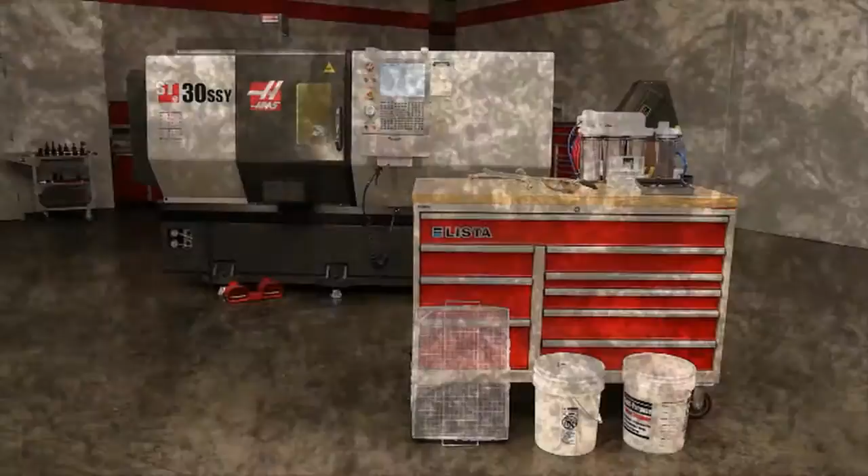Welcome to our Tools of Coolant video. We'll take a look at the tools most commonly used by shops to check and maintain their coolant.

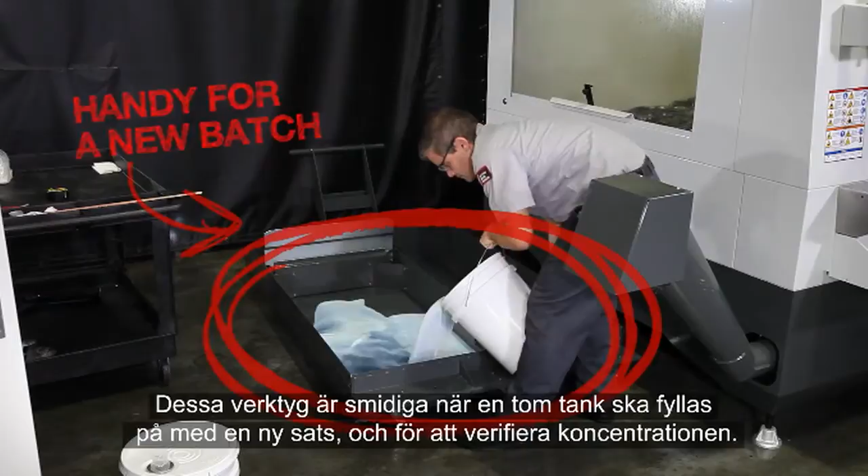We'll start off with the refractometer. This is the most important tool you'll use for keeping your coolant working correctly. Its purpose is to measure the concentration of your coolant. They are handy when filling an empty tank with a new batch to verify the concentration. But a refractometer is an absolute necessity when topping up a tank with coolant already in it.

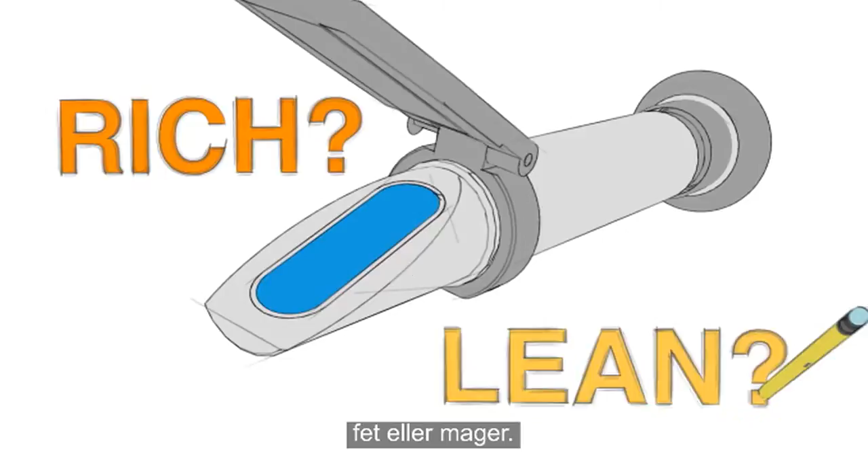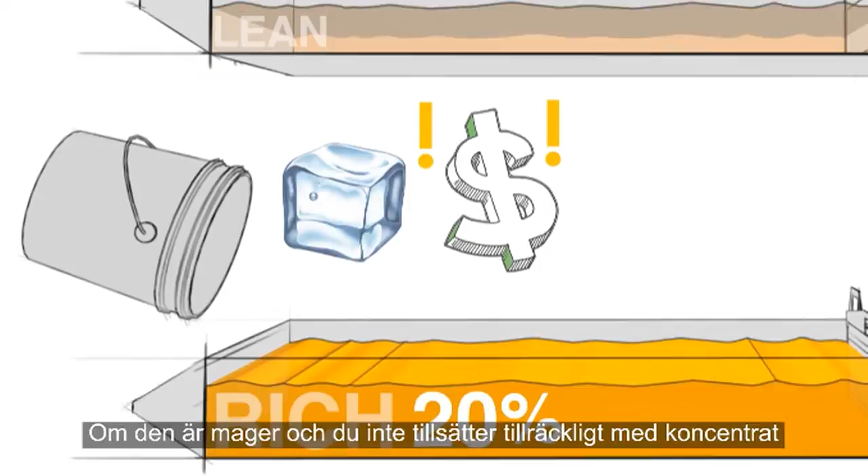Without a refractometer, there's no way to know whether your coolant is running rich or lean. If it's rich and you add more concentrate, you will simultaneously reduce cooling capacity and throw money away. If it's lean and you don't add enough concentrate, then you risk short tool life, bad surface finishes, and rusting your machine and parts. Guessing how much concentrate you should add will lead to problems.

Don't eyeball it. Measuring your coolant's concentration is easy with a refractometer. We're using a manual model here, but digital versions are also available. Think about this: for less money than this 5-gallon pail of concentrate, you can purchase this tool and never have to guess about your concentration again.

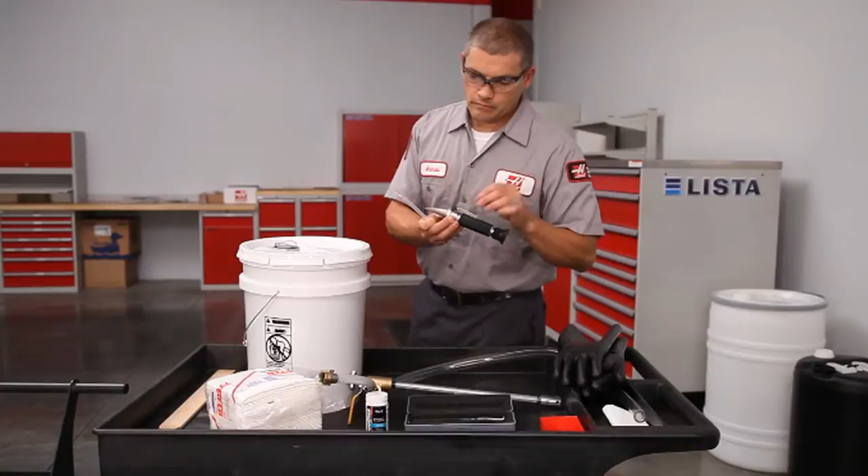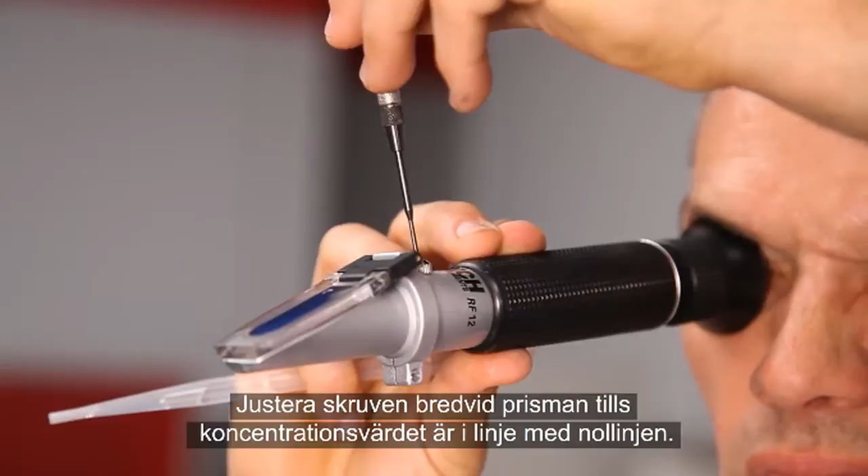So, how do you use one? The first step is always to zero the refractometer, or set a baseline for the water you'll be using to make your coolant. Place several drops of the water you're using on the viewing prism and close the plate. Adjust the screw beside the prism until the concentration reading is lined up with the zero line. Wipe off the prism. The baseline for this water has been set.

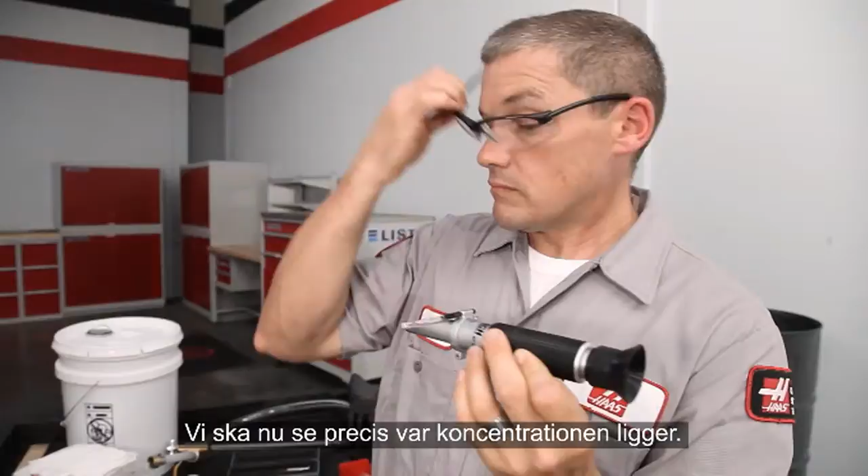Now let's check the concentration of the coolant. Take a sample and place several drops on the prism. Let's see exactly where our concentration lies. In this case, it's 8%, right in the middle of the 6 to 10% range, which is acceptable for most coolants.

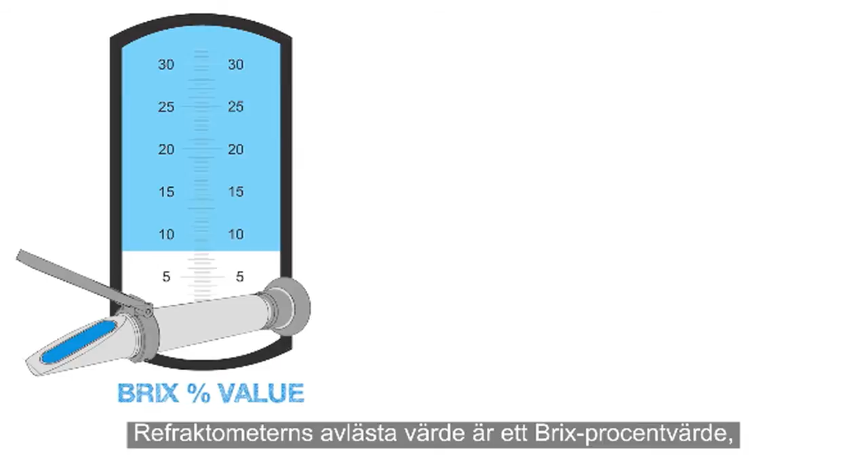The reading the refractometer displays is a Brix percentage value. This value isn't always the same as the coolant's actual concentration.

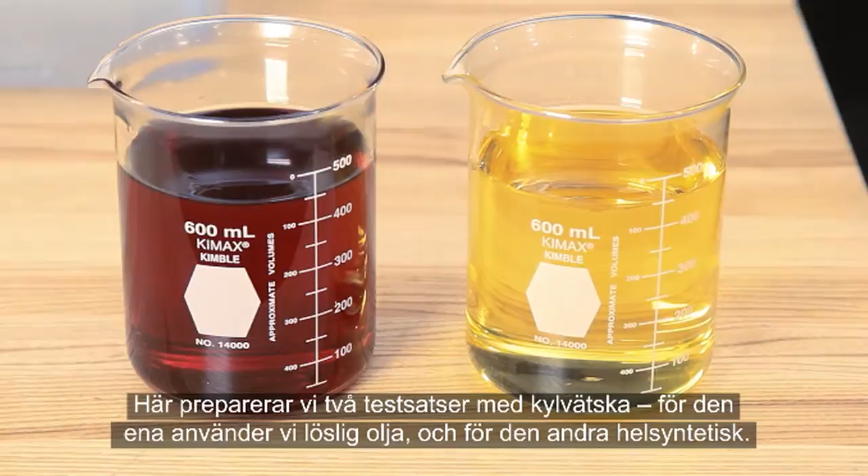Here we're preparing 2 test batches of coolant, one using a soluble oil and the other a full synthetic. Both vials are holding the same amount of concentrate, and both of these beakers are holding the same amount of water. We add the concentrate and mix thoroughly.

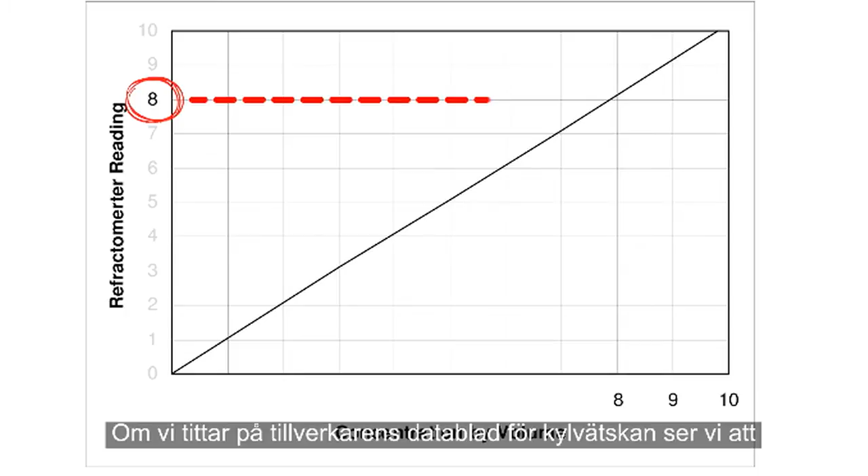Now let's see what our refractometer readings come out to. This soluble oil coolant shows a reading of 8% Brix. When you look at the manufacturer's chart for this coolant, 8% Brix equals 8% actual concentration, or 1:1.

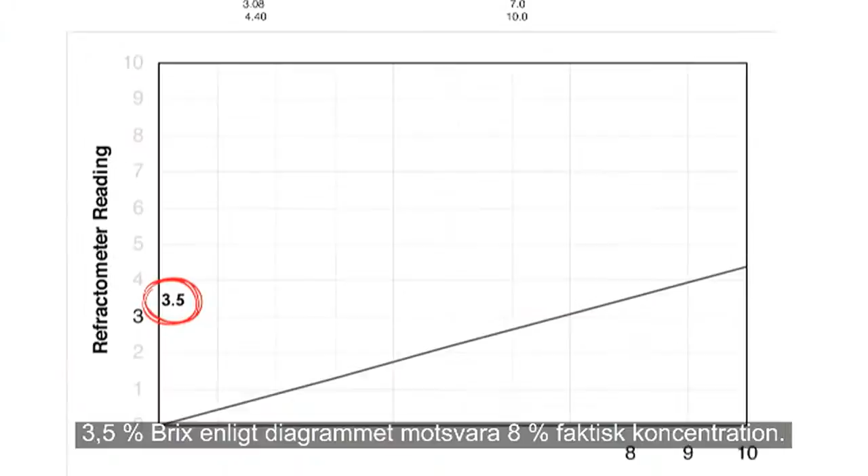The full synthetic coolant, however, shows a reading of 3.5% Brix. Looking at the chart for this coolant, 3.5% Brix equals 8% actual concentration. The ratio of this coolant is about 1 to 2.3.

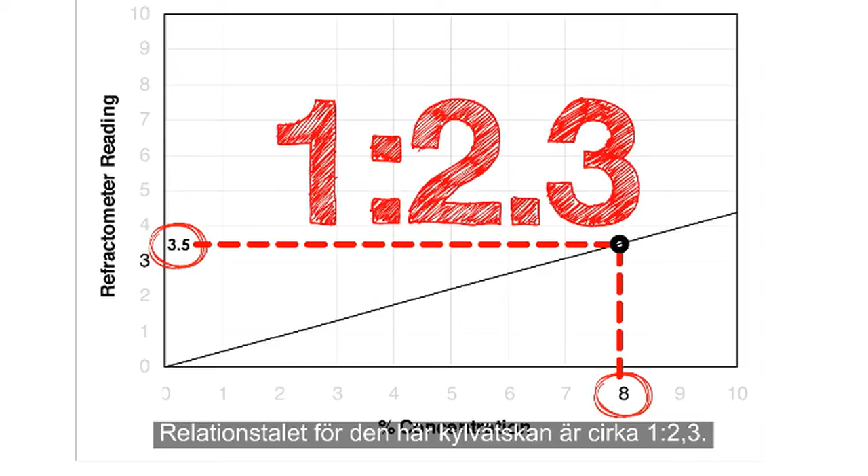The ratios are different, but the coolant concentrations are the same. Be sure to know the ratio of your coolant. Using a refractometer allows you to adjust your coolant based on sound information, not just guessing.

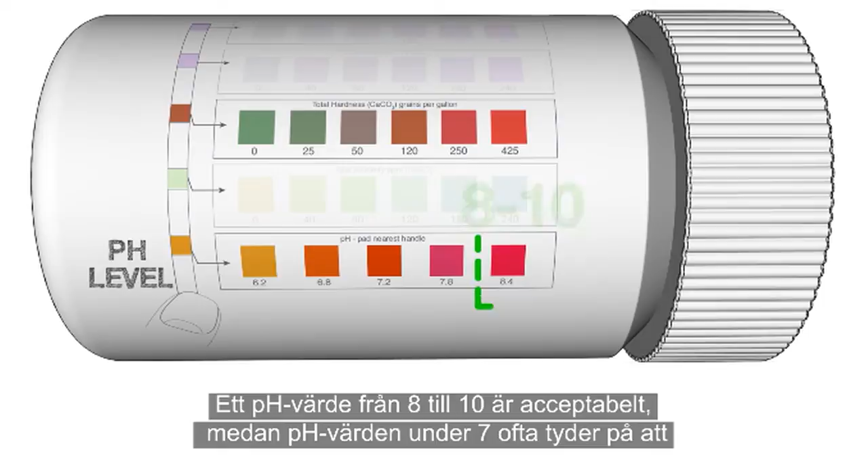What other ways can you check the condition of your coolant? Water quality test strips can be used to check the pH balance and water hardness of your coolant. A pH balance in the range of 8 to 10 is acceptable. pH readings below 7 generally indicate the coolant concentration is weak and increase the chance of corrosion and bacterial contamination.

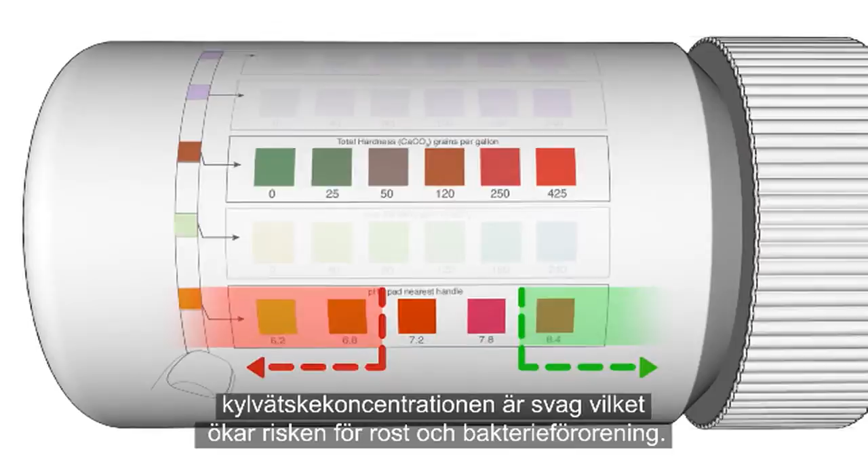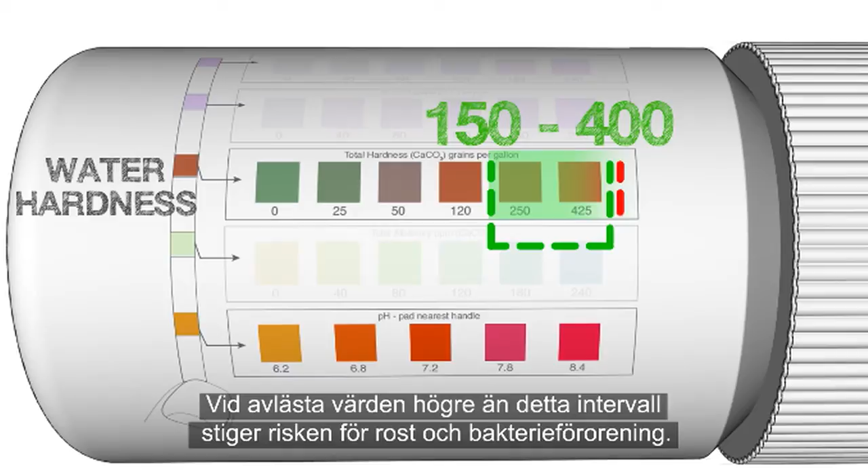A water hardness reading between 150 and 400 parts per million is acceptable for most coolants. Readings above this range also increase the chance of corrosion and bacterial contamination, and separation of the water and concentrate becomes more likely as water hardness becomes excessive.

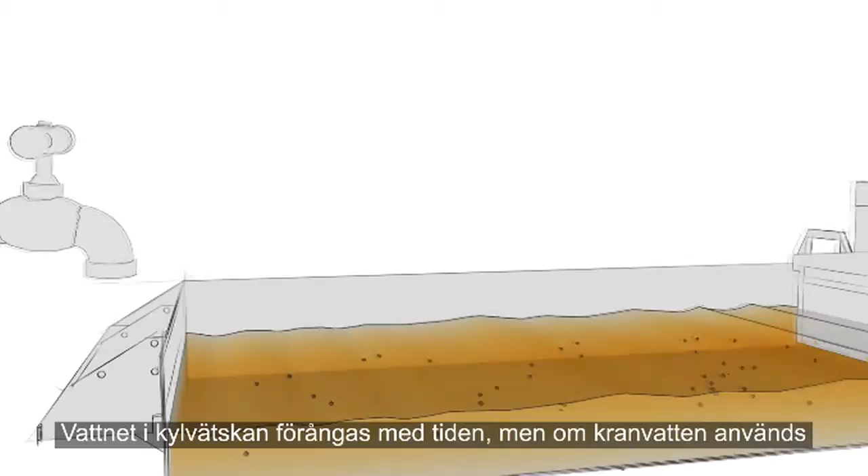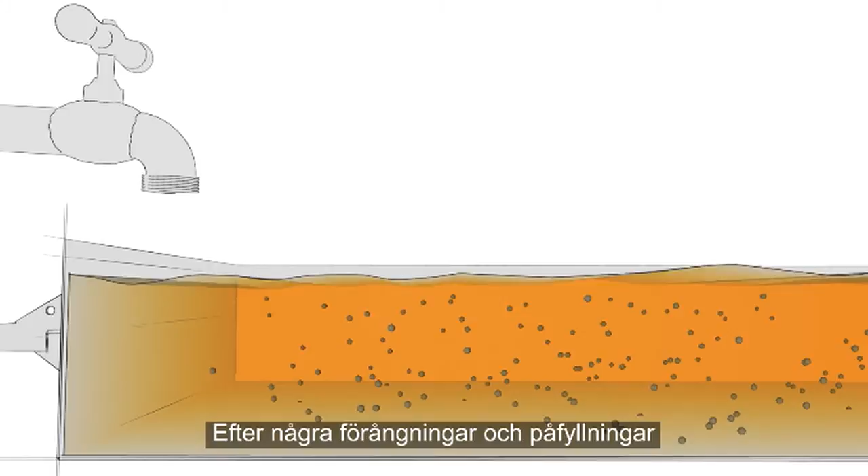So how does the coolant get to this high hardness level? Over time, the water in the coolant evaporates away. But if tap water is used, the hard minerals in the water do not evaporate. Each time you top up the tank with tap water, a new batch of minerals is added to the mixture. After a few rounds of this evaporate and top up cycle, you've got a tank packed with minerals, and your coolant may be ruined.

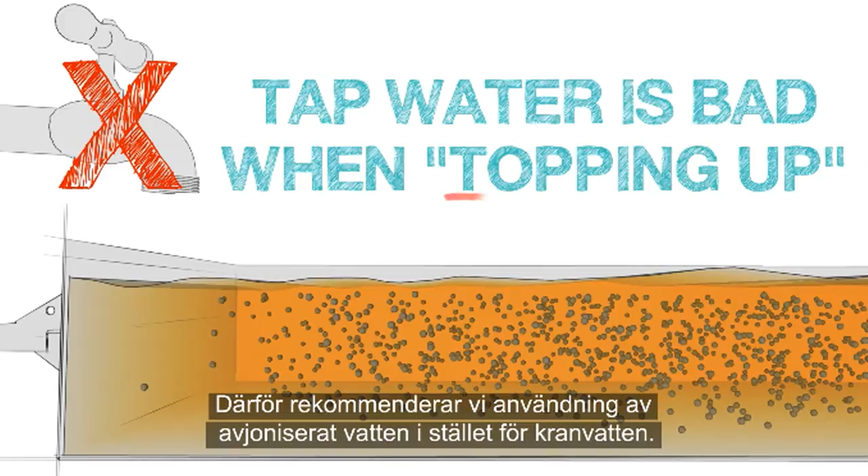This is why we recommend using deionized water instead of tap water.

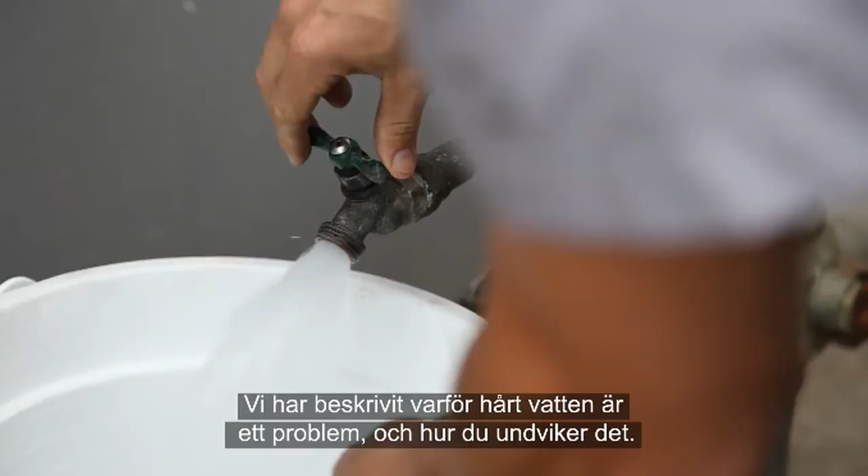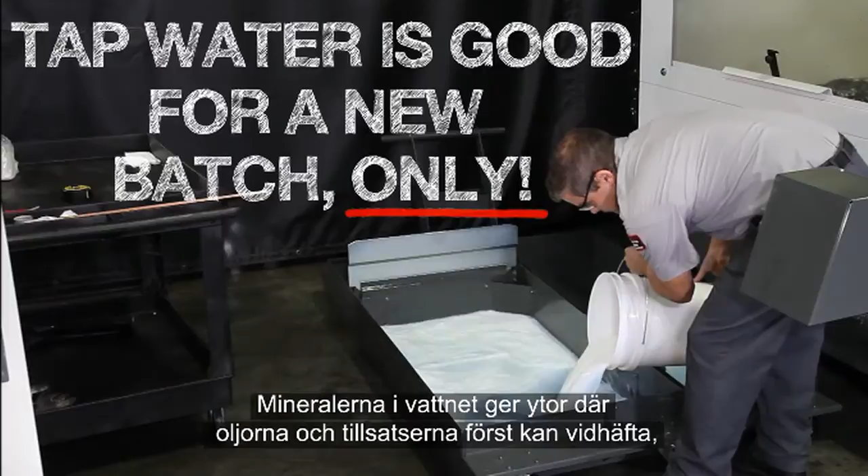Okay, so we've covered why hard water is a problem and how to avoid it. However, there is one exception we really need to mention. It's actually best to use tap water when you're making a new batch of coolant. The minerals in the water provide surfaces for the oils and additives to adhere to initially, yielding the best possible mixture.

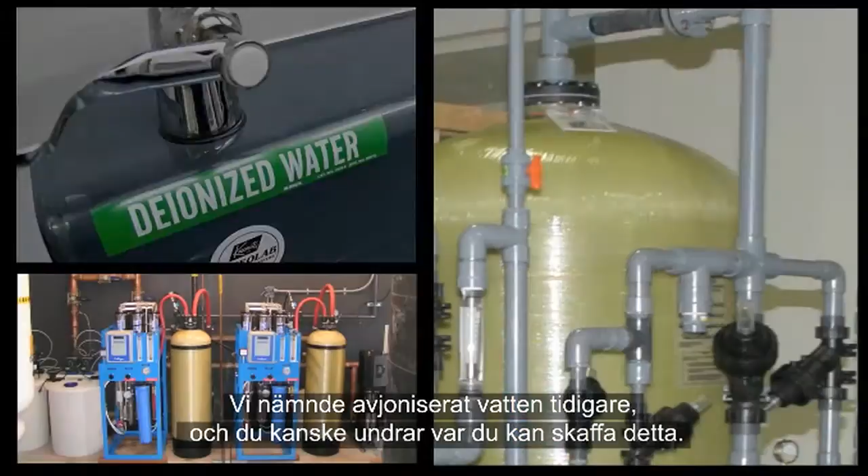Now, a moment ago, we mentioned deionized water. You might be thinking, where do I get this stuff? You can buy DI water from industrial water supply companies, or do what a lot of shops do, and generate it yourself using a water purification system.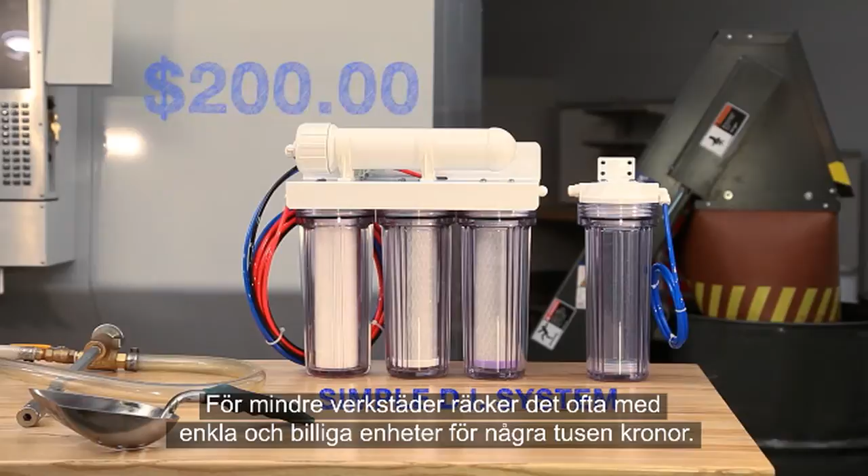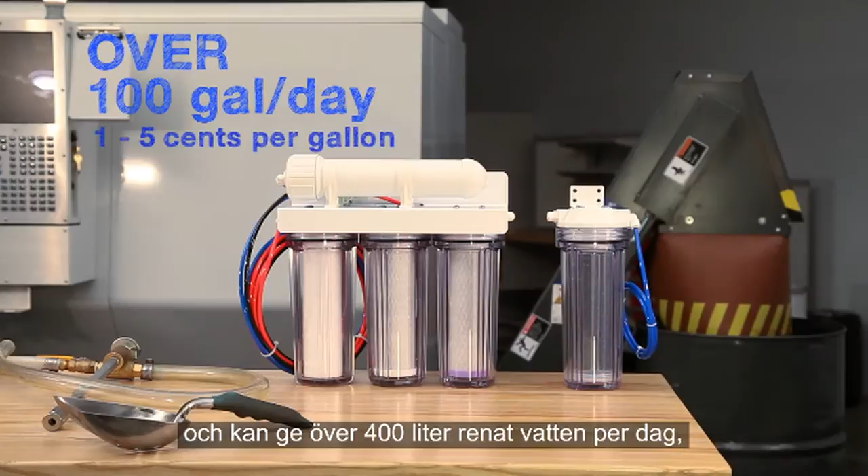Large shops with many machines often have complex installations maintained by water purifying companies. For smaller shops, simple, inexpensive units for a few hundred dollars are usually just fine. These simple systems combine reverse osmosis and deionization and can provide more than 100 gallons of purified water a day for a cost of 5 cents or less per gallon.

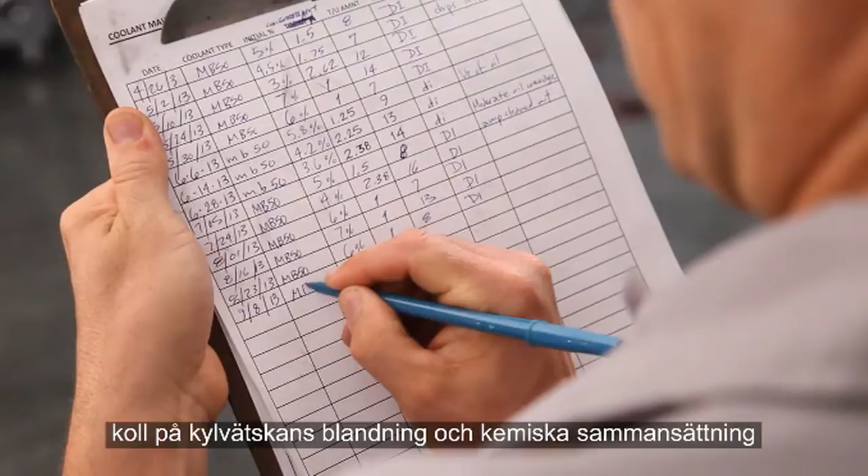If you attend to the maintenance of your coolant tank and keep your coolant's mixture and chemistry in check, you should never have to worry about bacterial infestations. However, in the unfortunate event that you've let your tank maintenance falter, you may find it turning into a stinky, disgusting mess. At this point, you may need to test for bacteria in your tank.

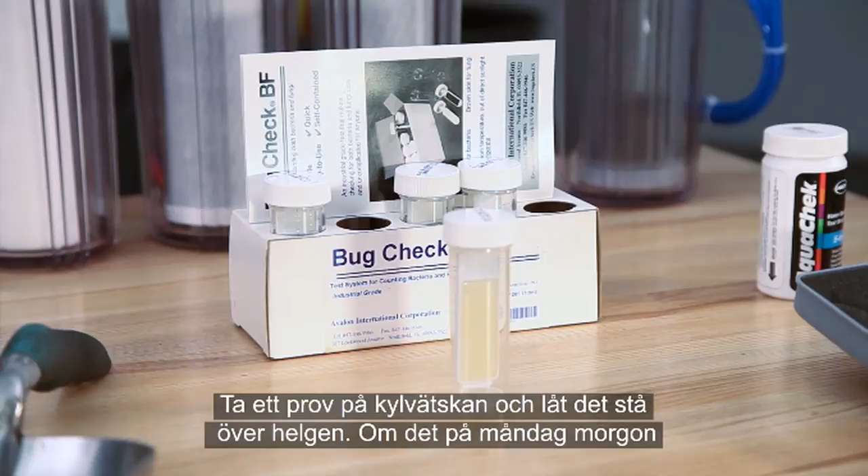Here we're using a bug check bacteria test kit. Take a sample of the coolant and allow it to sit over the weekend. On Monday morning, if it looks like this, you definitely have a bacterial infection.

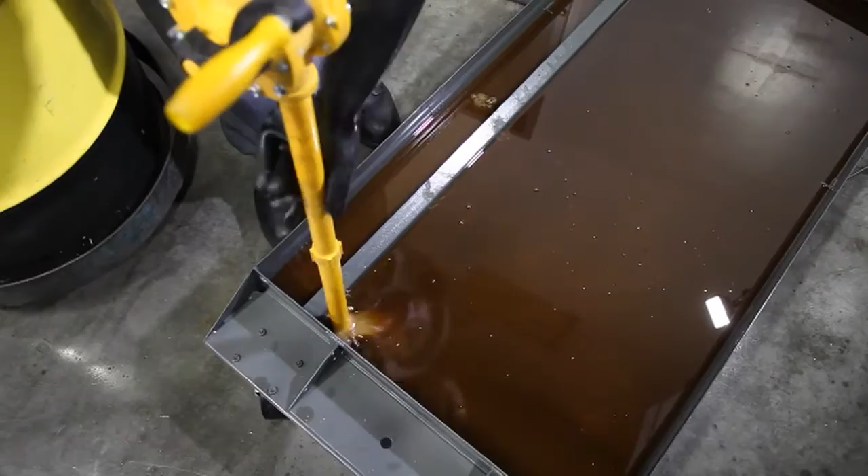In this case, you really have two options. You can add a biocide to your tank, or empty it out and start over. Since biocides are hazardous chemicals, usually the better option is to drain the coolant and clean the tank and pumps.

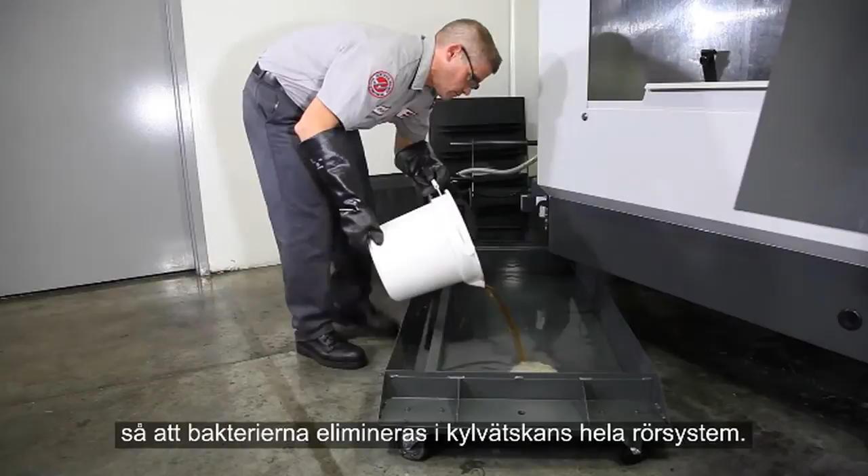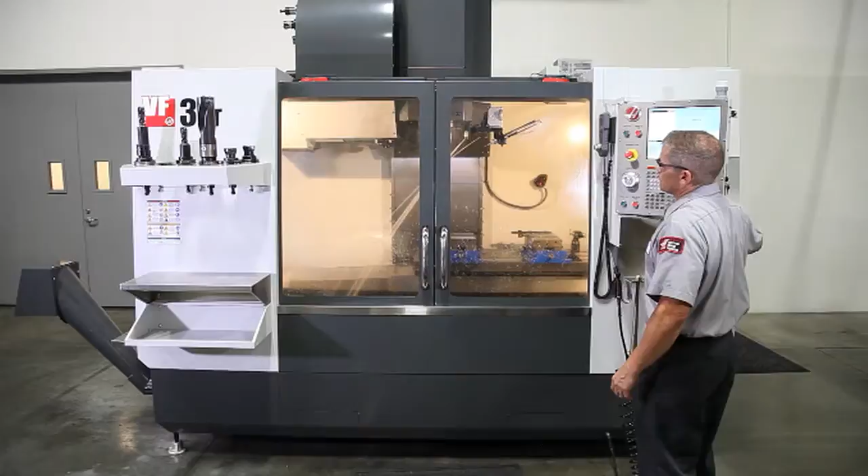Then you should prepare a high alkaline cleaner and pump it through the system to kill the bacteria that remains throughout the coolant plumbing. These high alkaline cleaners are usually available from your coolant supplier. They are typically mixed with water at a low concentration and run through the system for a few hours.

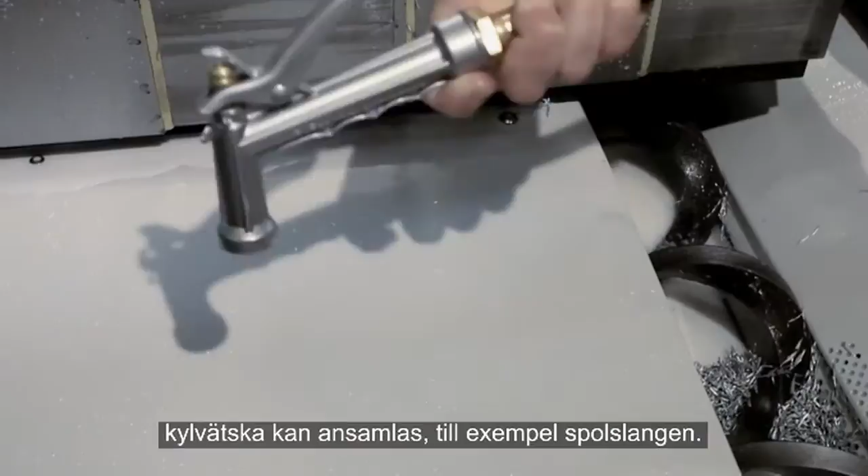Run all the coolant pumps on the machine and be sure to empty all areas of your coolant system where contaminated coolant may accumulate, like the washdown hose, for instance.

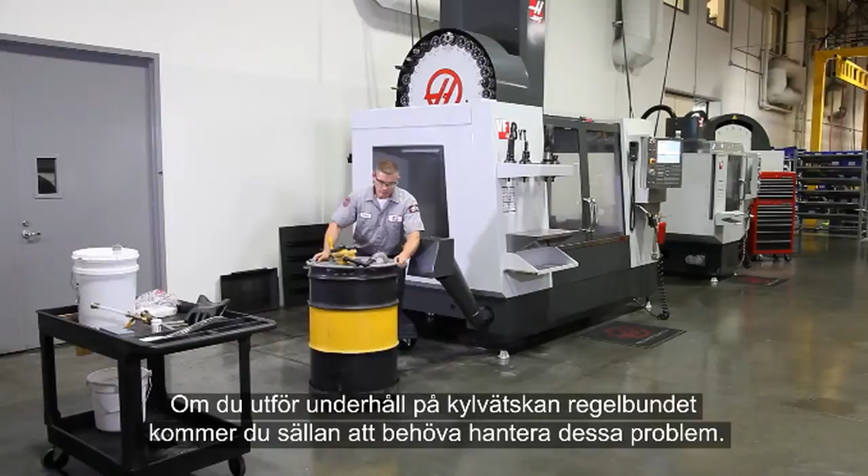When you're finished with the cleaner, drain it and follow it up with a rinse using a partial batch of 2% coolant in order to completely remove the cleaning solution. Now you're ready to start a new batch of coolant. If you properly maintain your coolant, all this headache should never be necessary.

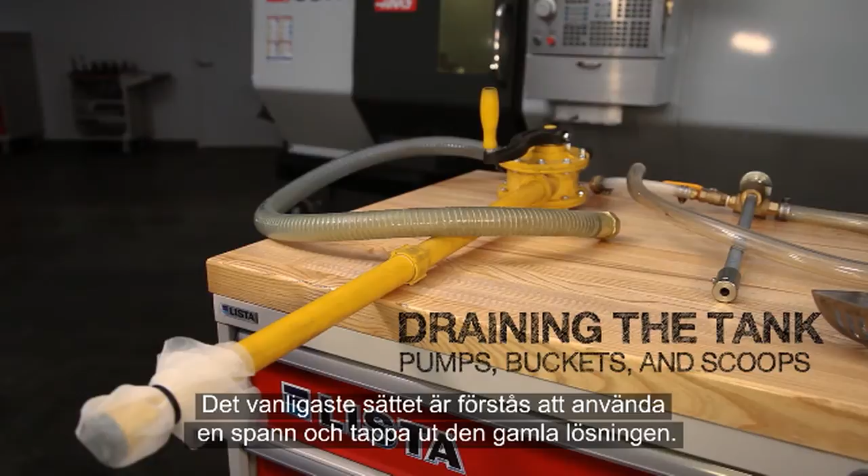When you need to drain the coolant in your tank, there are a number of ways to do this. The most readily available method, of course, is to use a bucket to bail the old solution out. This starts off easy, but it's difficult to get all the coolant out once the level is down below about 30% full. Some wet and dry vacs can be used to pump water out of a coolant tank.

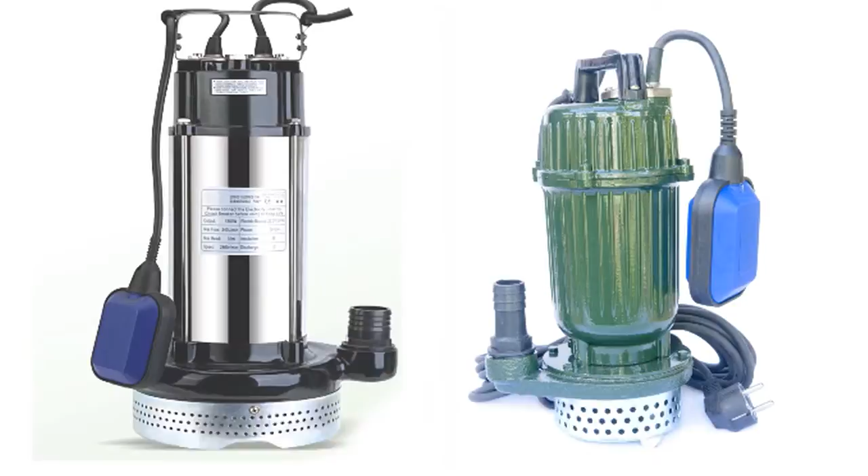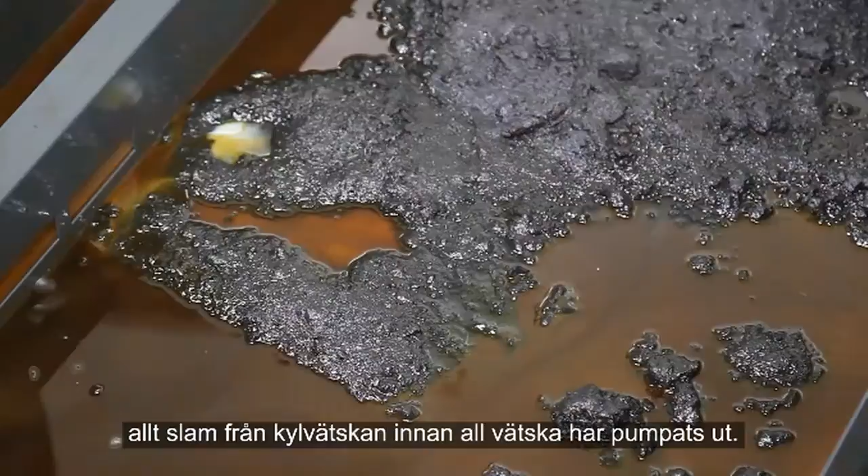Also, a wide variety of sump pumps exist. Even inexpensive smaller units can often be used to drain the tank of your Haas machine. But it's usually difficult to remove all the chip particles and sludge from the coolant before it's pumped out. So make sure the pump you're using either has a filter screen at the inlet or that the pump is rated to handle sharp metal fragments.

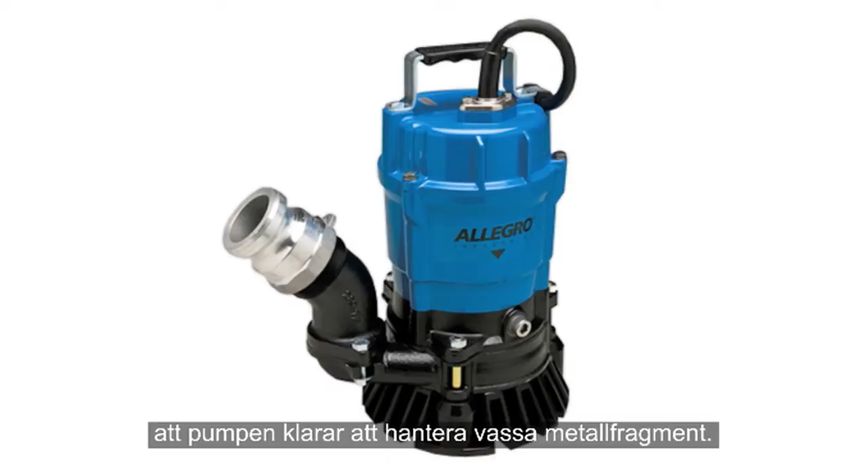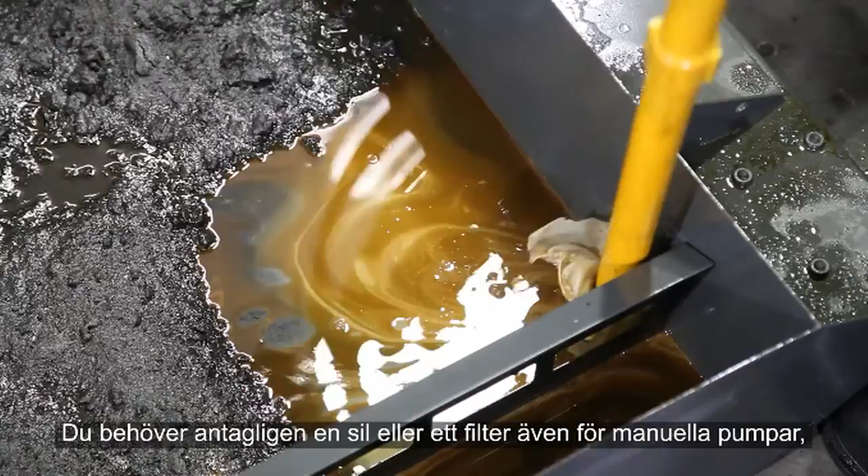Manual pumps can also be used. They are slower and take some effort, but do a good job of emptying everything in the tank. You'll probably need a screen or filter for these manual pumps too, since they will get clogged by chips.

When chips accumulate in your coolant tank, a perforated metal scoop can be used to lift them out easily, while letting the coolant drain off. You may recognize the metal scoop we have here. This sturdy cat litter scoop works surprisingly well, and they are easy to find online.

Sometimes, really fine chips or sediment-like contamination can reach your tank. Let's take a closer look at how the coolant inlet panel works and when you need to consider using a chip strainer. The perforations on the coolant inlet panel are very small and do an excellent job of retaining even fine chips.

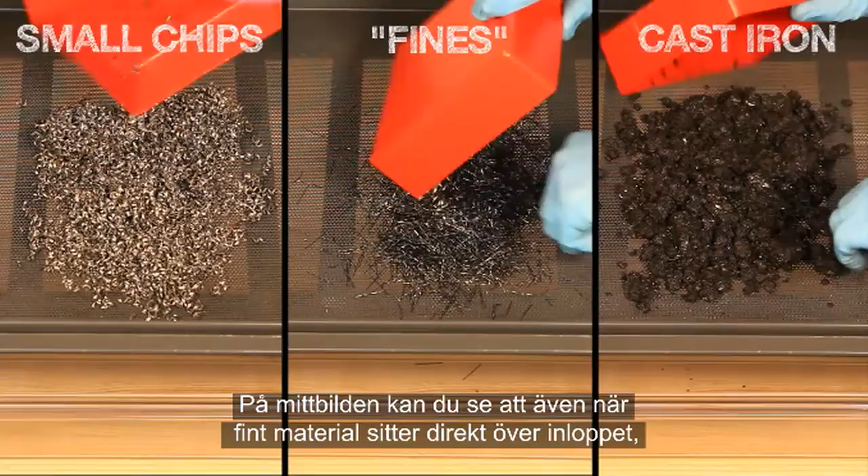In the center image, you can see that even with this pile of fines sitting directly over the inlet area, with coolant passing over them, only a small fraction of the chips make it into the pan. Despite this, over the span of many weeks, if the chips on your machine are extremely small, or you are machining something like cast iron where the chips form a grit-like substance, then a larger quantity of chips can make it into your coolant tank and gradually build up.

In this case, you should consider using a chip strainer like the ones that come with your new Haas machine. Stretched over the supplied chip basket and placed above the inlet panel, it allows coolant to pass through while keeping chips from entering the tank.

If you're going to mix your coolant manually, a graduated 5-gallon bucket can be used to measure the water and concentrate you'll be mixing. These buckets are readily available for purchase online, or you can make your own. A simple tip is to pour 1 gallon at a time into your bucket, measure each 1-gallon increment up to 5 gallons, and then mark the bucket at the measured spacing.

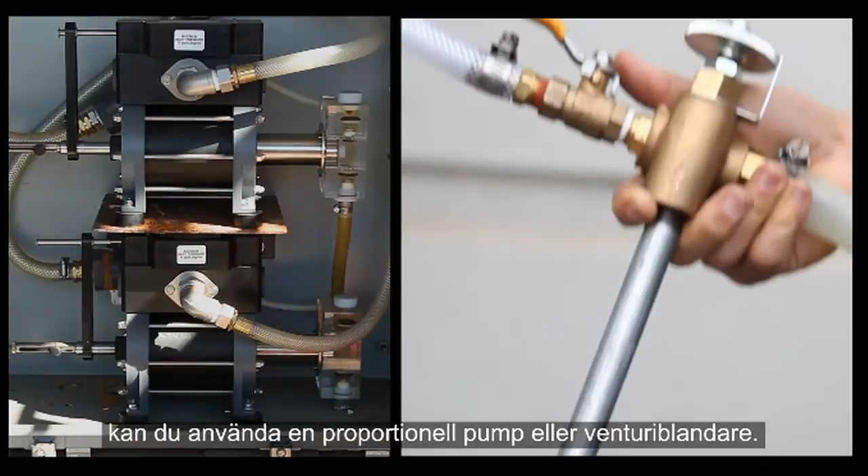If you want to mix your coolant in a quicker and more thorough way, consider using a proportional pump or Venturi mixer. Proportional pumps are usually used when higher volumes of coolant need to be made frequently, and when coolant needs to be pumped over longer distances. When lower coolant volumes need to be made, the Venturi mixer is the less expensive option.

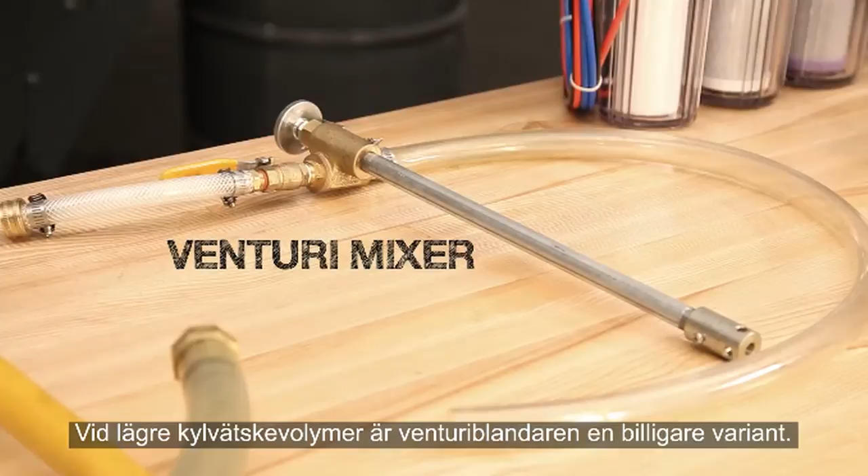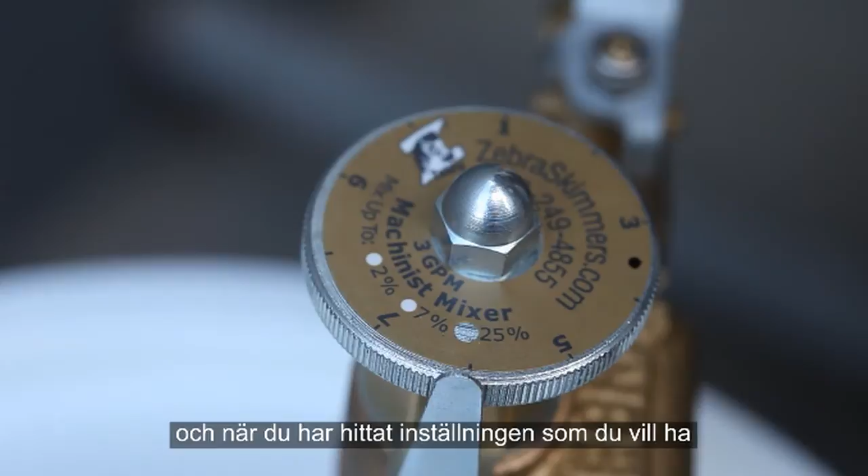The mixer uses water pressure to draw a metered amount of concentrate up into the water stream, where it mixes completely with the water as it's dispensed. The mixer can be adjusted to output a range of concentrations, and once you've found the setting you want, note the position of the dial or mark it in case someone else adjusts it. That way, you can always get back to exactly the right setting with a quick adjustment.

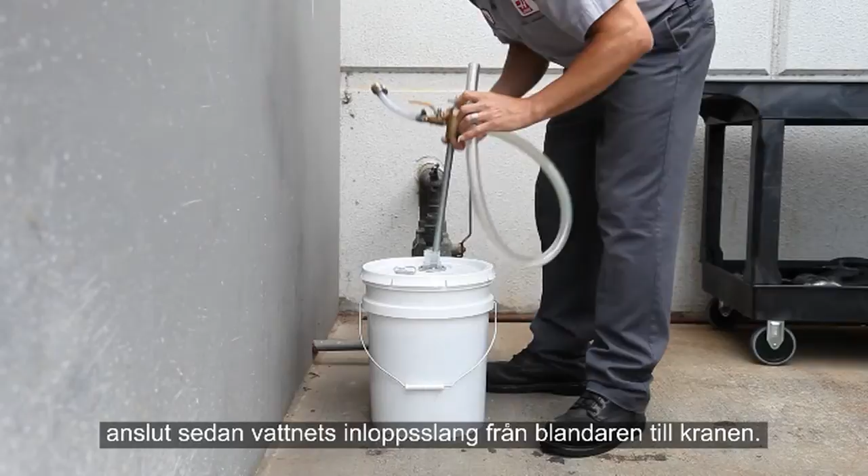Place the mixer's suction tube into the concentrate container and then connect the mixer's water inlet hose to the faucet. When selecting a mixer setting, dispense a small amount of coolant and check it out with your refractometer. Once you have the mixer adjusted to your satisfaction, you're ready to mix coolant.